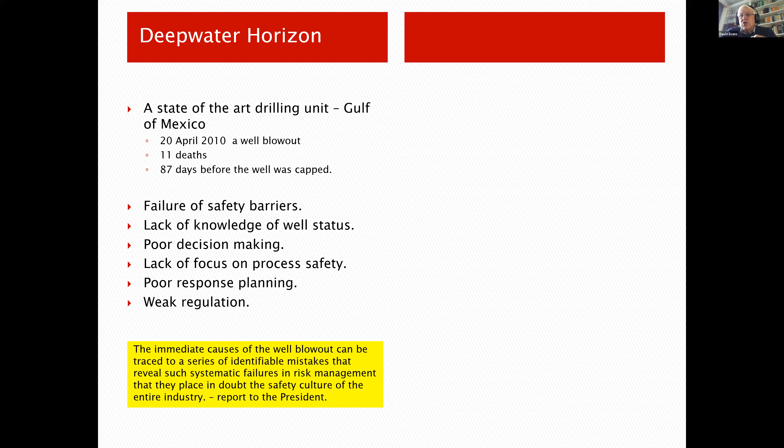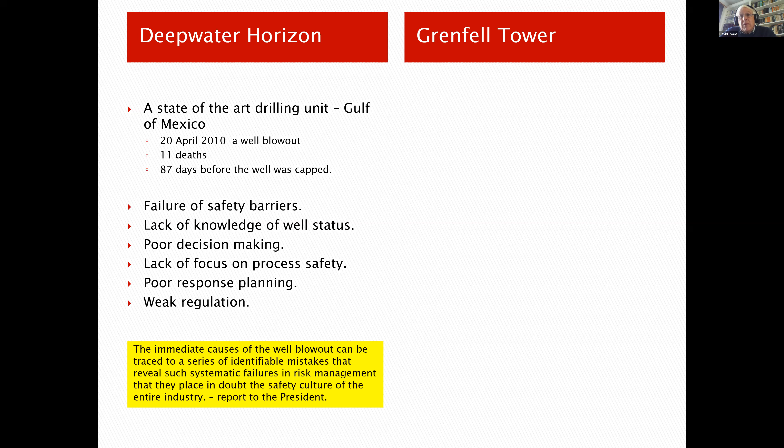In the UK, a number of you will have heard of the Grenfell Tower fire. This was a fire on a block of flats - a large block of flats, about 70 meters tall, if I remember right. Designed in the 1960s, built in the 1970s, and then later refurbished to bring it up to more modern environmental standards. And on the 14th of June, 2017, there was a fire.

And the fire started in somebody's flat, and it started, I understand, on a washing machine. Now, that should not have led to 72 people dying, but it did. Now, when I go through the tools and techniques and raise the questions that we go into on process safety - why aren't we applying some of these techniques, ideas and tools to these areas?

What happened? There was a failure of safety barriers. The fire was allowed to spread. And by safety barriers, we could be talking about fire doors, protection of conduits, protection of the fire moving into the external cladding, the properties of the external cladding allowing propagation. There was a lack of knowledge of the responders to the nature of the threat, in particular the speed, and what to do and how to communicate and how to evacuate a block of flats with a single stairwell exit.

Again, poor decision, poor response planning. And in the Judith Hackett report on it: weak regulation, confusion of the structures, and so many linkages. Judith confirms that we must begin to think about buildings as systems. I would argue we need to think about work as systems. We can consider different layers of protection, in this case, to make the building safe.

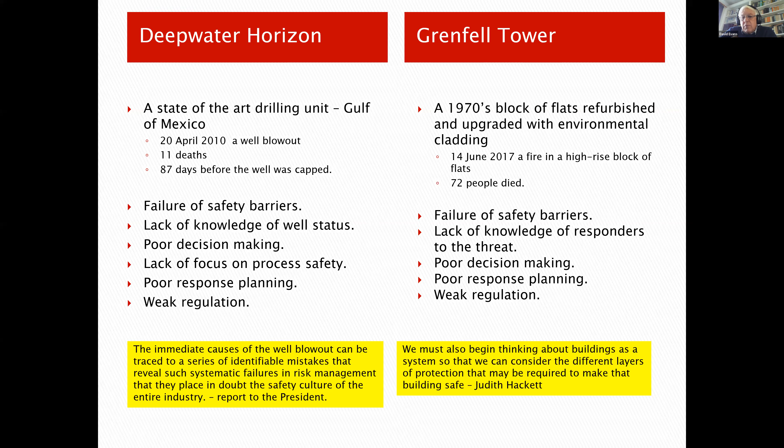So I hope this resonates with you. The next time you look at a block of flats, a high-rise building, or you walk onto a process plant or operation, just have a thought through some of the things I'm about to say. Process safety, as I said, evolved out of major incidents, and its evolution has not been smooth.

They want to tell us that severity is a big part of what we're looking at. They want to separate it from what they've termed personal safety, routine health and safety, if such a phrase even exists. They said we should look at personal safety and we should need to look at process safety incidents, and you'll find this in a lot of documentation - that process safety is different. And to a certain extent it is. It has its own tools, its own techniques.

It needs focus, and this is why they wanted to separate it. They wanted to get buy-in. They wanted people to say you can't just lump it into one cauldron and stir it.

If you look back through a large number of major incidents, you'll find that the sites themselves were promoting personal safety, the routine safety elements, very, very well. One of the tragedies of Deepwater is that they actually got an award that night for their low levels of accidents, for the routine problems, the lost time incidents. They were top of the heap and they were getting their award. And of course, the message is, but you can't get that because you're not focusing on process safety. You can't put all your elements into one basket.

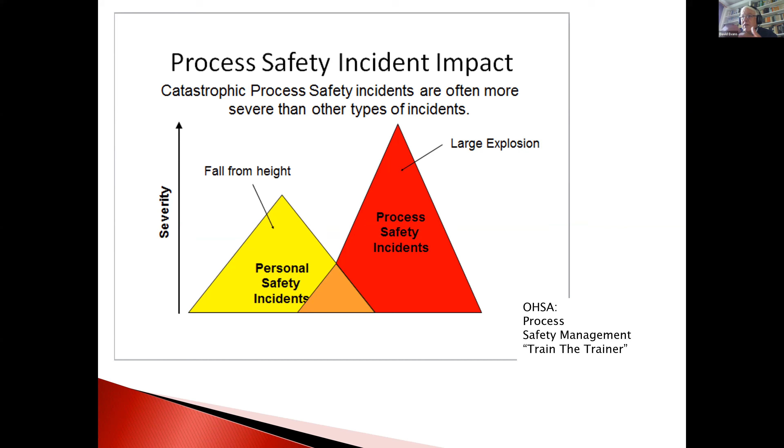But if by focusing on process safety we can improve - which is what Grenfell should have done, it should have challenged those higher risks, it should have looked at the consequences - then maybe we can all learn from each other.

So this is what you find if you do a documentation search: that process safety differs from occupational health and safety, the personal safety, because of mechanisms of causation, scale of potential, and the fact that it is, by virtue of being process driven, focusing on engineering and design. But don't we have engineering and design in manufacturing and construction, in hospitals, in aviation and other areas? Of course we do. And so these elements should all dovetail across.

And they went on - a couple of key factors I pulled in to identify causation of process safety incidents: a failure to distinguish the need for different approaches to manage hazards. There is a difference, and this is the difference between occupational health and process safety.

Occupational health looks at events that have a greater likelihood - yeah, we see them, we pick them up in LTI accidents, we see the reports, the near misses, and therefore we can do things about it very quickly, but they have lower consequence. They tend to lead to injury, sometimes severe individuals, rather than large numbers of people on the plant and associated with it. And there are assumptions that strategies for managing personal safety are similar to creating safe conditions and processes.

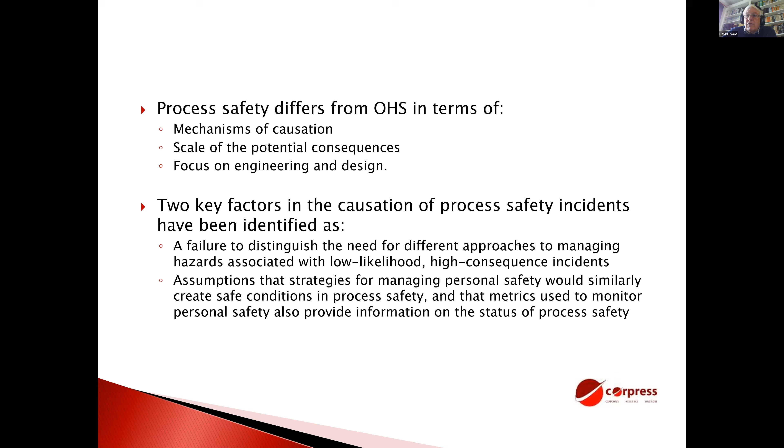And certainly the metrics that we were using and continue to use for personal safety do not provide the information we need on the status of process. So we can look at definitions.

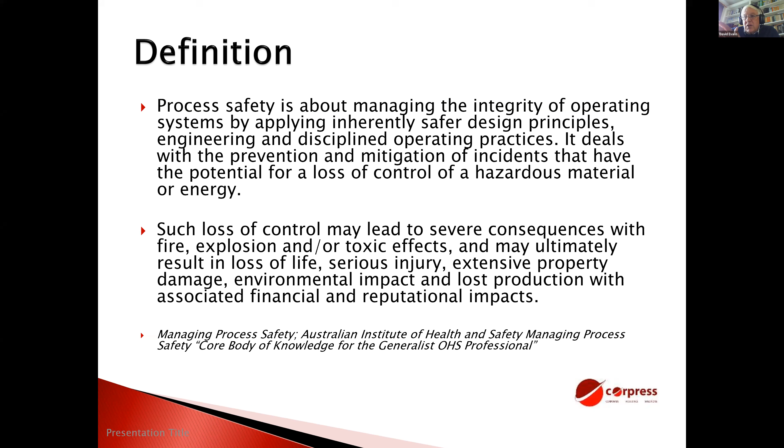It's about managing the integrity of operating systems by applying inherently safer design principles. We know this - if you're dealing with a large volume of highly flammable material at very high pressures, you need specialist knowledge and very good precautions. It deals with the prevention and mitigation of incidents that have the potential for loss of control of a hazardous material or energy, and leads to extensive property damage, environmental impacts, and so on.

Now there's two, I think, key themes to process safety. The one I'm going to follow is very much what's inbred into me, because I come from the UK. So it's the HSE, it's the view of COMAH, Seveso, the view of risk being a driver in these areas rather than regulatory prescription.

But let's not forget that OSHA has process safety management. It adds the word management, and it is a management system. For those of you working with or exposed to OSHA-based systems, you'll be well aware of this. It has 14 elements. It's driven towards highly hazardous chemicals, and it applies the processes to certain quantities of those chemicals and certain sites.

Now, I was in Texas in 2013 when the ammonium plant, West Texas, went up, killing, I think, 15 emergency responders. I've written separately on the timelines, the timescales, and the issues. Here we have a tragedy of hazardous materials, which very few people knew what the hazards were.

Yeah? And you think, what? This is in a city or a state where it has a record of one of the worst ammonium nitrate disasters, when it lost a ship in Galveston that blew up. So we have no knowledge. Knowledge is something that is very ephemeral.

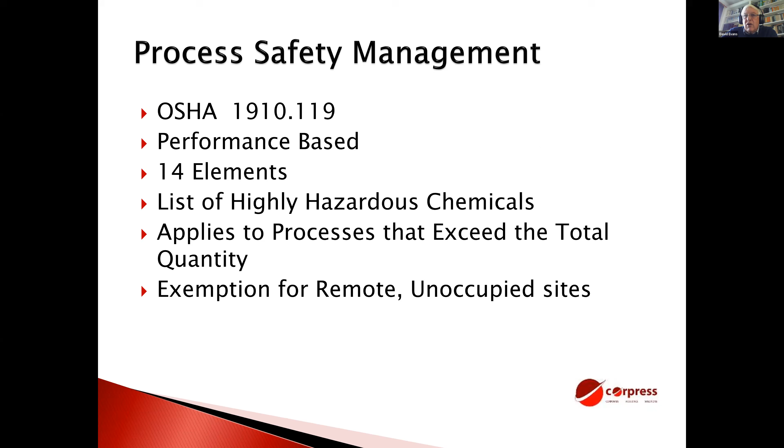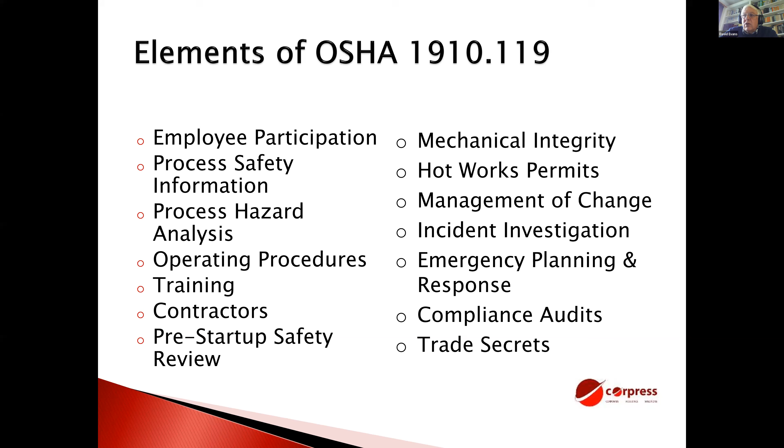The elements of OSHA, you can see them here: process safety information, hazard analysis, hazards - key point of this - operating procedures, training, contractors. Who doesn't have fun with contractors when you're trying to maintain safe systems? Integrity, mechanical, management, change, hot works. They're all solid elements common to all elements of process safety, whether you pick up Australian guidance, UK guidance, anything in the Middle East, Singapore, and so on.

They're all there and form part of this system. In my language, this is my model that I carry around with me. I think of it as being technical. There is a very, very technical heart to this, but nobody can know everything. What I mean is I'm relying on technical expertise. I, as a facilitator, need to know the questions to ask. I may not know whether the answer's right or wrong, but I can look at it later. But I need to know there's a technical heart to this.

There's an operational control. There's no point me developing the best process plant in the world and finding that my operators are not competent to operate it. But it's not operational just in terms of operators. It's down to maintenance, management processes, procurement, HR. Every element of an organization fits into this - the management processes, the procedures, the people.

I have a tendency to feel that process safety ignores people. It moves too far. As engineers, it's much nicer and easier to deal with calculation than it is to deal with somebody who wants to tell you that something's wrong. And they don't particularly like you either, because you're not listening to them.

So it all comes together and it fits around the background of hazards, communication and resources. And time - I'm going to come back to time later, because that really does bug me. I'm sure Louise is also keeping an eye on time, because I tend to talk too much, too slowly.

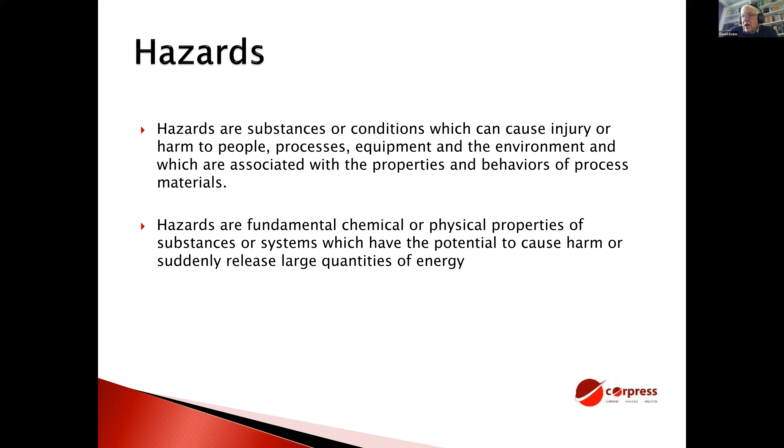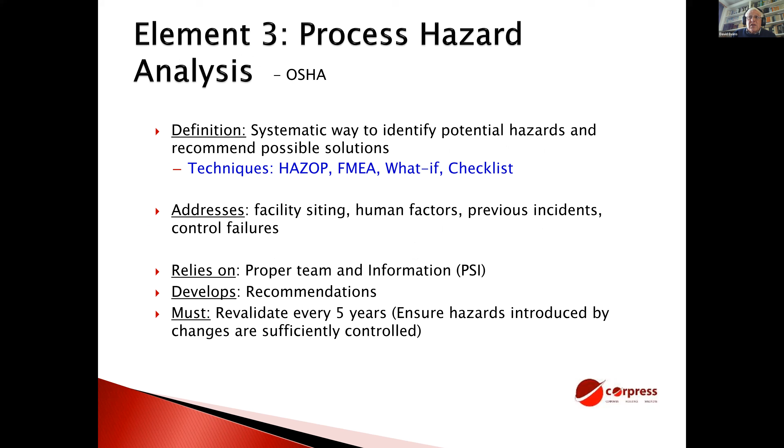If you look at OSHA, they recommend a range of techniques. They also address where they should be applied. And they start to bring in human factors. They're saying that hazard analysis is a team process. It isn't about me or you doing it. It's about bringing people together. It's about capturing knowledge.

So there's a range of tools. What do we look at? I'm not going to go through these, it's too short a talk to even do this. We can do a high-level hazard screening. What do you think the hazard is? Well, I don't know, what about you? Let's brainstorm. We can do a more structured process, hazard reviews.

Hazard identification, HAZOP, one of my favorite tools and techniques. Numbers of days sitting in on HAZOP studies. Hazard and operability, a great technique. Again, developed in the 60s. Kletz was part of a team that did it, and it's very, very interesting.

Identify the hazards, pressure, temperature, whatever, and then ask what changes. What can lead to a change? How can it change? What are the operating conditions that prevent it? What are the mitigation factors? What do we need to reduce it? You strip it down, very, very detailed reports. If you've never come across it or seen it, look into it and see what's there.

Its strength is phenomenal in terms of early design input to process plants. Its output, though, I have a lot of questions.

We can look at event trees and fault trees where we're bringing up a whole series of issues to a top event. What causes the release? What causes the fire? What causes the explosion? What has to happen? What are the steps and what are the stages? And when we've got them all together, we can start to apply probabilities and estimate risk.

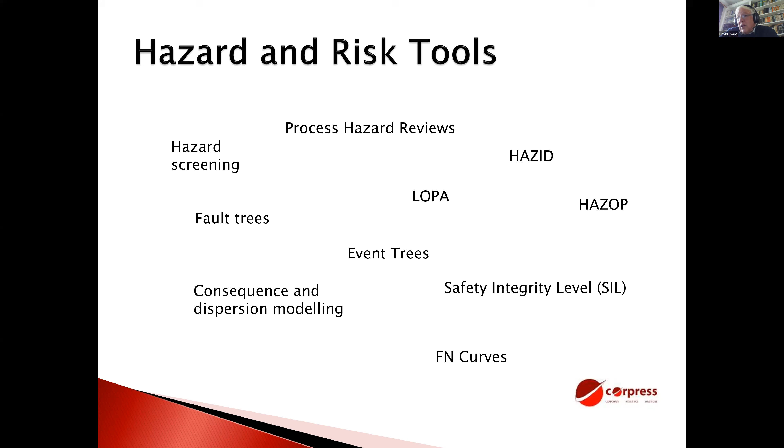Event trees as we run forward. What happens if I get a release? What is going to happen? Will it get detected? Will it find an ignition source? Will we get an explosion? And so on. We have consequence and dispersion models. We have frequency and number curves to look at how many people will be injured, killed, damaged, and so on. I'm going to come back to hazards in a minute.

What we're trying to do in the tools and techniques is identify from the hazards what the safety critical elements need to be. We need to look at high quality safe work, permit to work systems, tagging, logging, all of these form part of what I described earlier as the system. There's no one element, there's no one safety barrier.

There's a multi-element shift. What went wrong on Deepwater Horizon was they managed to override just about every safety barrier that should have been in place. And of course, they should have had better information. Operation of a pressure relief valve with pressure vessel at the required conditions. Well, of course, I've got a pressure vessel, I've got a pressure relief valve. How confident am I it's going to work?

Pressure relief valves don't always work. How confident am I, if it does work, that the relief system that it vents to, or the area it vents to, is a safe area in which to vent? 1,000,001 questions that can come through.

What I'm trying to do is identify, for me, on my process at this point in time, what are those safety critical elements? You're sitting on the 20th floor of Grenfell Tower. It's the night there's a fire in a flat about 7, 8, 9 floors beneath you. What are your safety critical elements? Because that building should have had, whether it's the fire escape, fire doors, the fire alarms, the communication system, they're all safety critical elements.

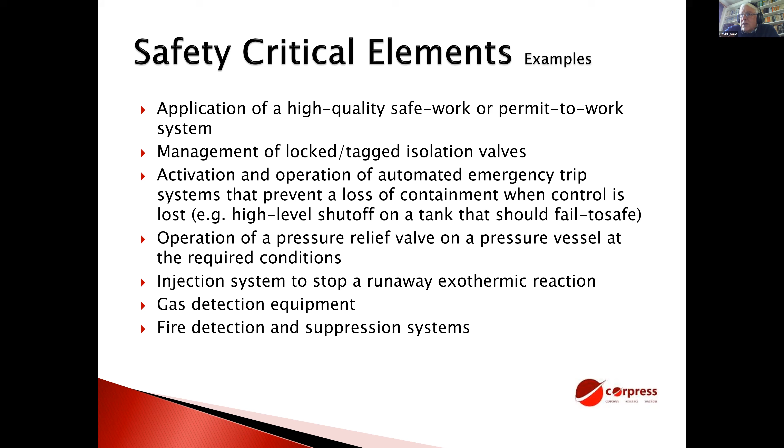Sit in your car. What are the safety critical elements? I'll put brakes in as one, but let's move on.

We can see them, but they very much share a linkage into occupational health and safety. That's what I mean - OHS safety is a foundation stone of process safety.

Let me look at it another way. What goes wrong? We've got lots of reports. We've designed our new plant. We've done our hazards, our hazard studies. In the UK, we'll have developed safety cases. We'll have paid consultants to do detailed risk assessment. I can tell you what, there's no shortage of information. We've got lots of information.

So I have a brand new plant. It's just been commissioned and somebody hands me the keys. I'm not sure if any of you have been in those situations, but it's often a lot nicer than running a plant that's 35 years old.

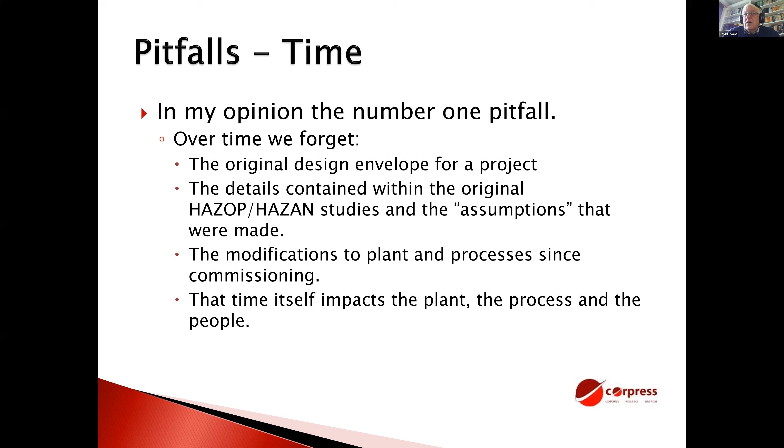And at the same time, the plant itself is getting older. It's cycling, going through more processes. The people, they come, they go. You lose knowledge every time somebody leaves. And it's a pitfall to process safety.

Risk. I believe the language of risk is vague, regularly misused, and we all have our own views. I mentioned hazards, getting back to the start. Risk exists in various domains in its own right.

So procurement don't actually want to buy that oil that you wanted for the compressor because they've got a cheaper option. Trouble is that cheaper option isn't quite to the same specification, but no matter, it's close enough for operators. And that's not the first time I've come across it. So there isn't one part of your business that shouldn't be engaged in process safety and have knowledge of it. They don't need to know everything, but they do need to know what their part is in ensuring that the systems that you want to be safe remain safe.

Risk, unfortunately, is not simple. We start on the first lesson as harm, probability, risk. I have an incident, I can calculate the probability of it happening, and I get this magic thing. But often I can't calculate it because it's too complex, too difficult, takes too much time to get the data. So I put a risk matrix together, then I've got red, yellow, green, or any variations of numbers I want, and I stick it there. And nobody likes it, so we move it down.

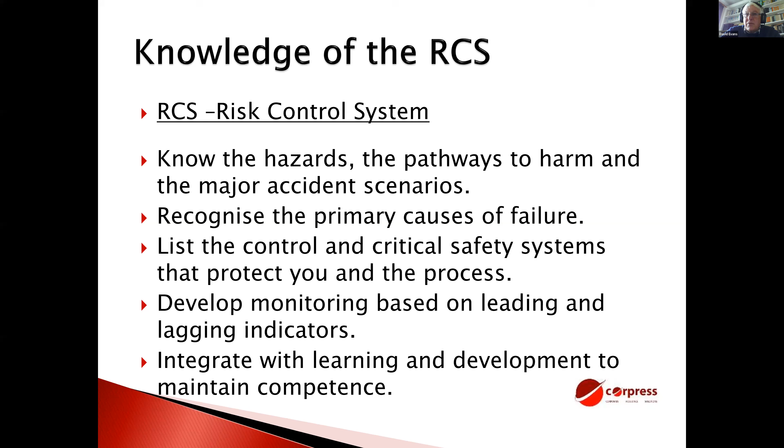Integrate with learning development to maintain competence. These are, I think, some of the absolutely critical things that would indicate a good system to me. And back to the hazards. The hazard just doesn't go from hazard to an incident, to a major incident, without going through a number of stages.

And I have to respect that that may happen, and therefore I need a whole series of mitigation barriers. In Grenfell, the initiator was a fridge-freezer fire. The barriers that should have prevented that fire leaving that flat didn't work.

They got a loss of control, fire affecting the cladding outside, smoke internally and fire within the flat. But I've still got my mitigation barriers. I should still have the alarms, the escape routes, the fire teams, I should still be able to get people out. I may have lost the building, but God, I did not want to lose all those people. So both sides of this equation are there.

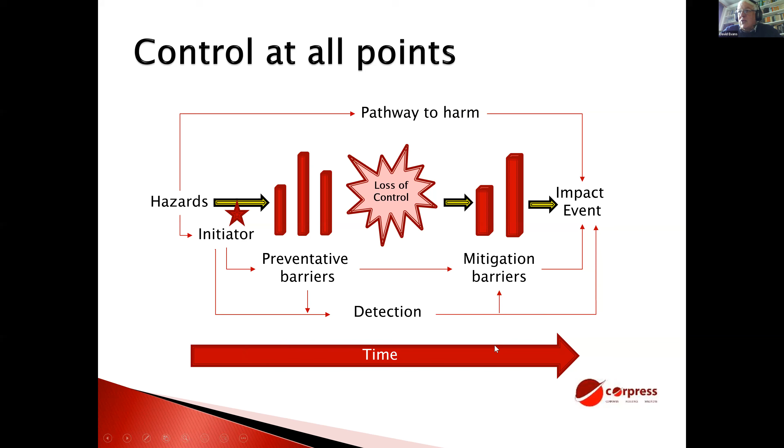But I want to know how quickly I can detect. And the next thing I want to know is how much time do I have between that initiator and that big bang, for a process side of it. How long do I have between that washing machine catching fire and getting everybody out of that building? And what do I need? Are these barriers going to give me that time? Can I do it? How are the leading indicators? So time becomes important again.

One of the great tools that I think came out of process safety was this thing called a bow tie. It's a simple concept really, but what it did was take an awful lot of early risk assessment and quantifying of risk and put it into a picture. It said, if we can show the hazards and the barriers and controls, then hopefully we can understand what's happening before we have the top event.

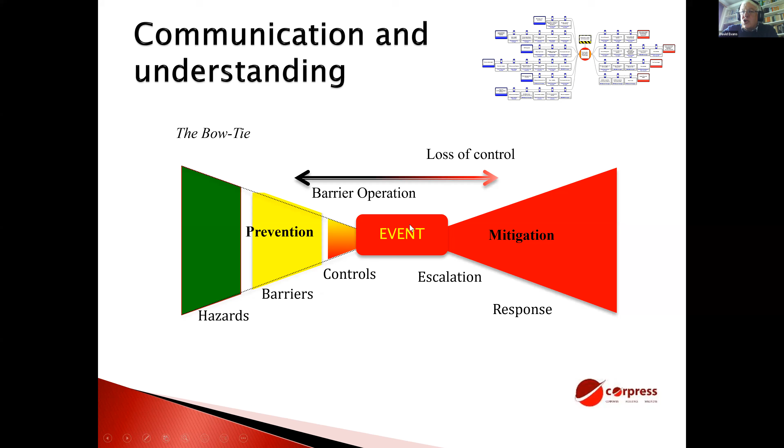And what I want to know is that these barriers and detection work, so I can prevent it, I can stop it. But I also want to know, if it hits, that the escalation and response also has mitigation barriers, and these are the ones traditionally shown across the right-hand side. So if I do drop a load, I don't want anybody standing underneath, for example. There's a whole series of things I can do to prevent the worst impact of the realization of this harm. And all of this is documentation again.

So my initiator follows a pathway to impact. That pathway has to have those barriers in place. And I think what's important is the time, but also the awareness of the hazards and the detection systems for the barriers.

Three questions for you to take away. How do you know if your safety barriers are working? And I don't care whether you apply it to driving your car, sitting in your flat in the evening, at your process plant, or at your construction site. The question still remains: do you know what the safety critical elements and activities are? Do you know that what you've got in place to protect you is working? How do you know? And how would you find out if they're not?

Do your inspections and audits allow you to check these leading indicators? And are they linked to the safety critical elements? And finally, a personal plea: do you know how much time you have from detection of a problem to intervention? Because time is never on your side. In summary, whether it's operational, integrated, learning, or technical, it has to fit across both sides of this bow tie.

Engage, support, learn, and improve has to be a motto that you take on board. Right, just a couple of minutes then, to run through what I think the future should be, because I've probably covered far too much, far too quickly, and everybody's already lost. It's going to get a bit worse.